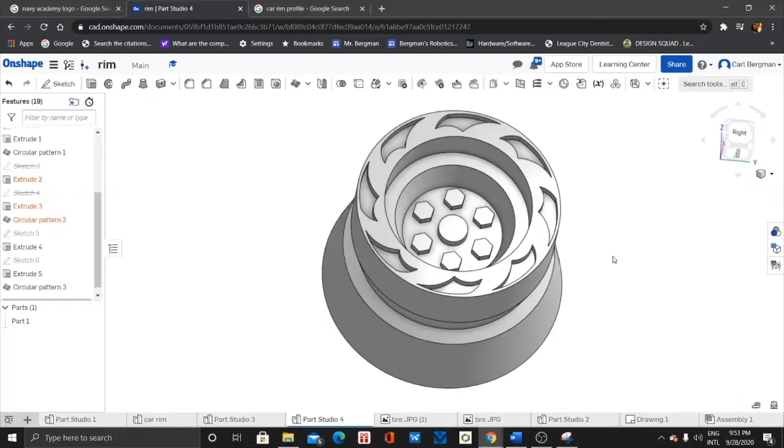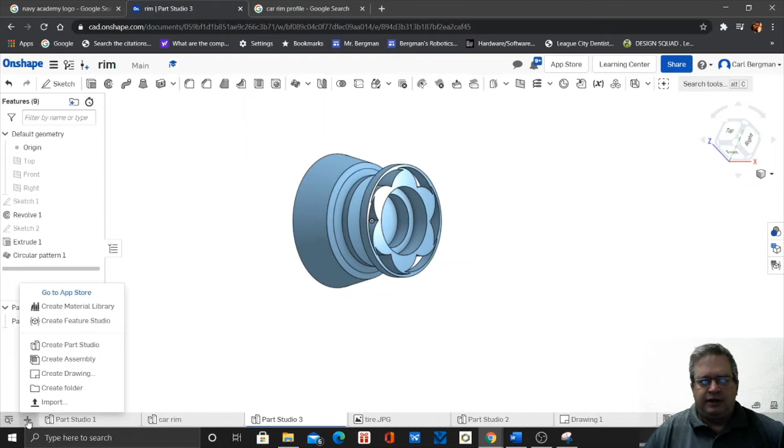So we're going to create a car rim. Let me fix my... You can go ahead and Google car rim profiles, and we're going to look at creating this profile to create your rim. It's not going to be exact, but you can go out there and do a screenshot of one of those profiles. I just drew my own, kind of eyeballed it and did my own.

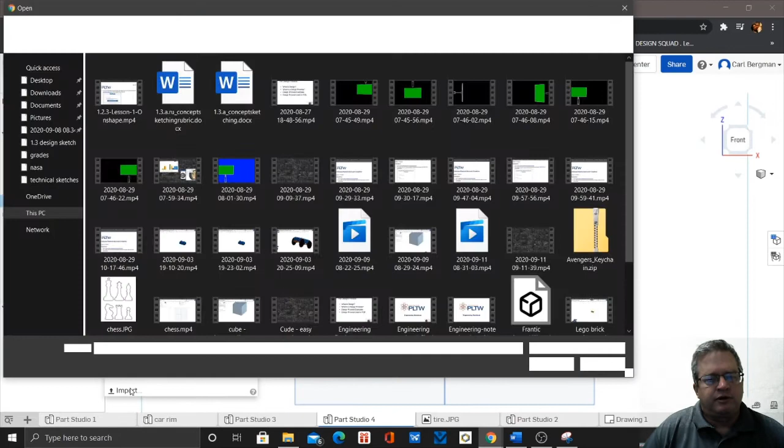I've already imported it in there, and that's the plus sign on the bottom left-hand corner. You go import picture into your project. I've already done that, so I'm going to go ahead and sketch, and then go to import image. It looks like I didn't already import it, so I do have to import it. So I'm going to go import, and here's all my other images. Got to find where it's at. It's at the bottom. All right, so this is one that I created myself.

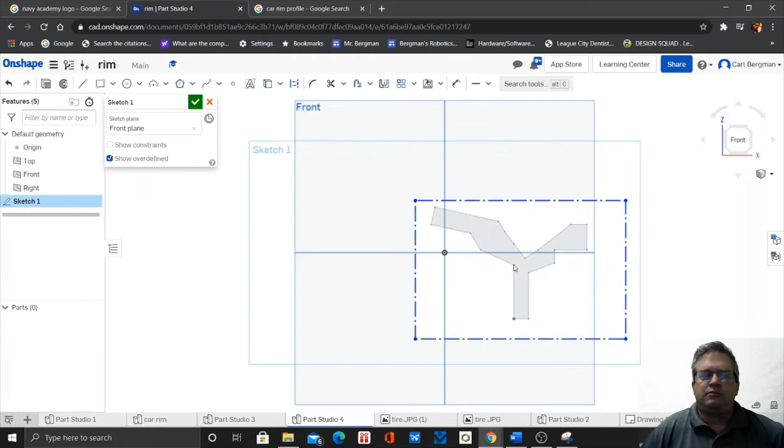The important thing here is that the two endpoints, the left and the right, are going to be straight up vertical. The upper two vertical lines do have to be vertical, and one of them is not, so it's a good idea to make sure they are. Otherwise, you're not going to be able to sketch on those with your flames and other stuff. So make sure those are vertical.

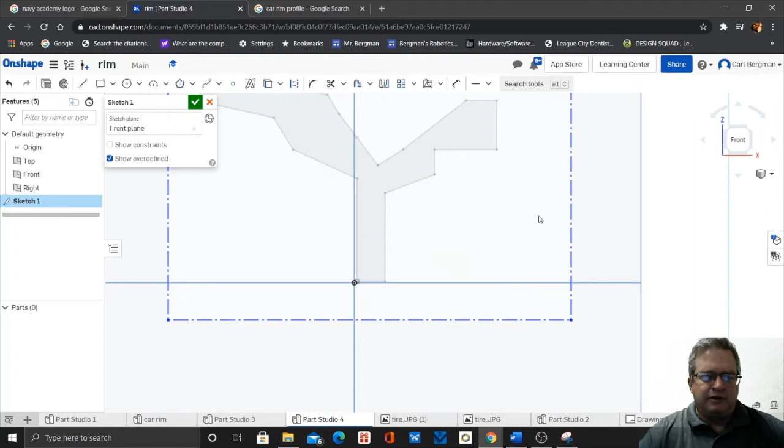So make sure one of your corners is in the point of origin, and you're going to want to make sure that you start and stop at that same point.

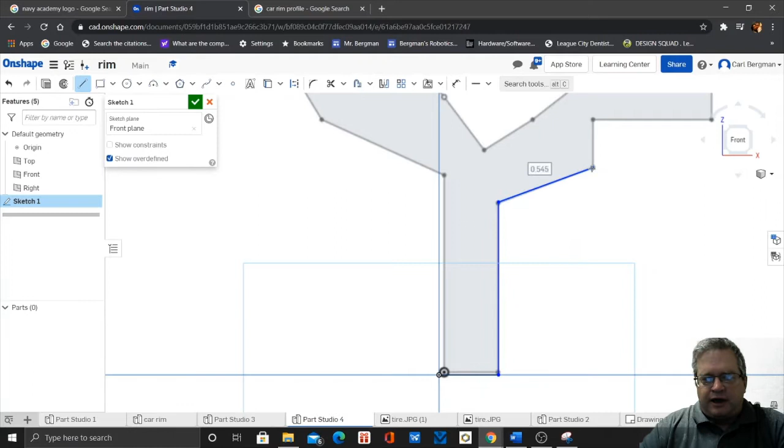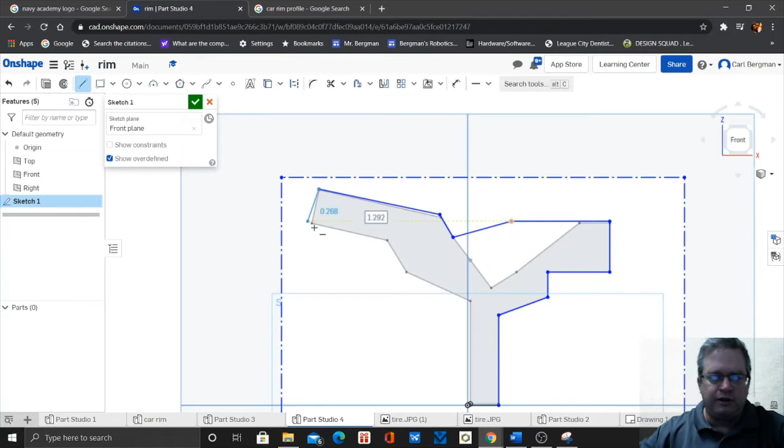We're just going to go line and trace it out. It's just line features, all we're using, we're not using anything fancy. And if you see that vertical line there, that has to be straight up vertical, and you'll get your symbol there if it is. So we're going to make this a little bit shallower than the original sketch. We want to get the left and right correct, but the rim was just a little bit too extreme, so that's why I cut it off at the top there.

All right, so the right hand vertical line is really important, and that's where we're going to sketch our flames onto that one. So once you got it connected and it's grayed out, you click OK, and we're going to revolve.

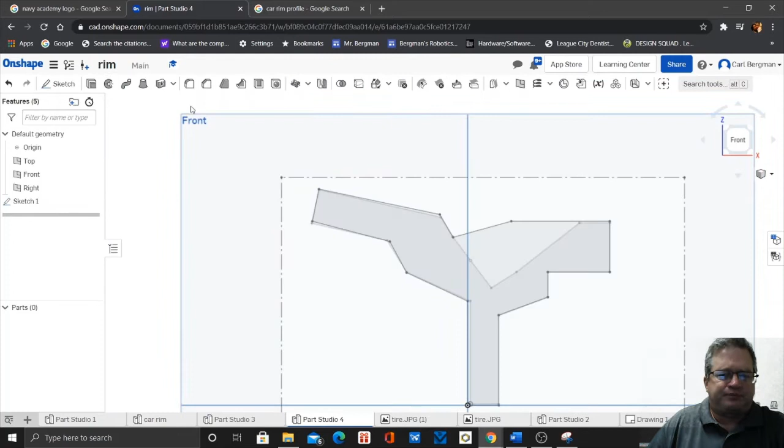So select our face, and if everything turns orange, that means you got it correct. We got to reselect our face, but there's our axis point. We have to reselect our face. Oh, no, it worked. Okay, did it work? Let's see. There it is, all right.

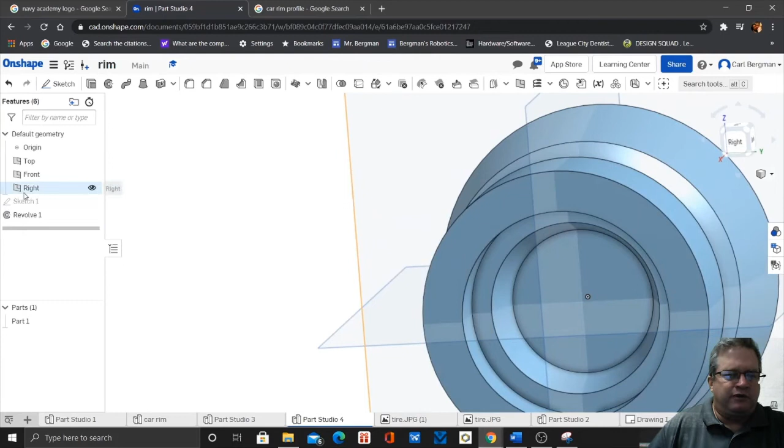So then you want to turn off all of your planes so you can see a clear view of your rim. All right, so we're going to sketch on this side of the rim. Remember I told you that the edge was important, to make sure that it was vertical, or you're not going to be able to trace on that thing.

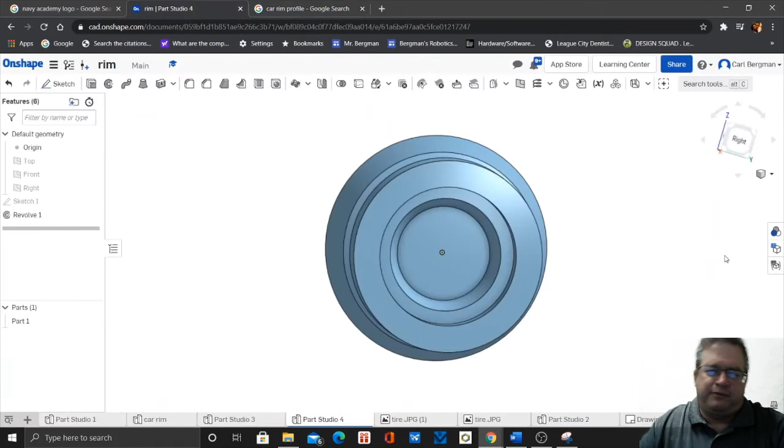All right, so we're going to pretend like we know what we're doing, and we're going to click, then right click and create a new sketch. We're going to try to create some flames here. So we clicked on that surface, then right click new sketch, and we're going to do a 3-point arc.

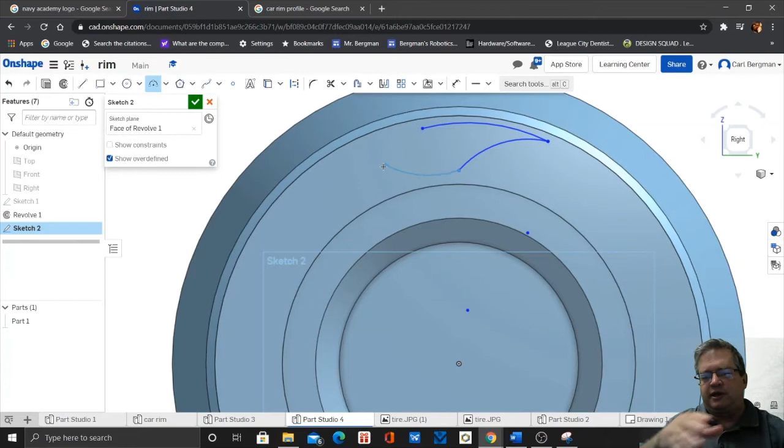And zoom in. We're going to try to create some flames, and you can go really crazy with this if you want. Remember, you have to click a couple times to anchor that in there. All we're just going to do is a 3-point arc. Make sure the lines don't crisscross each other like I was almost doing at the top there.

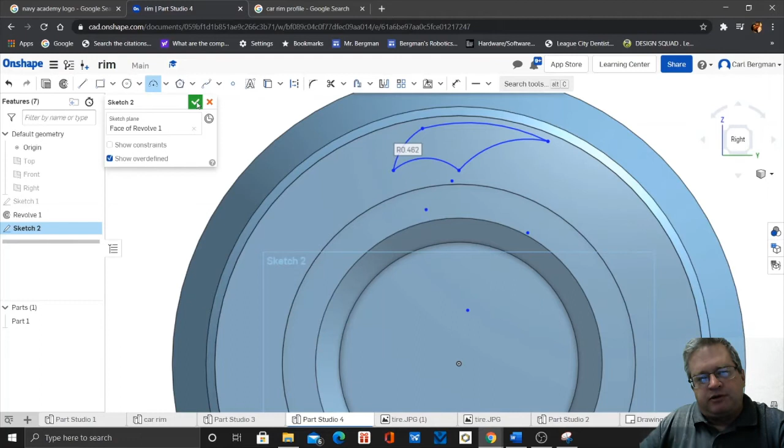We're going to try to create that. The flame is going to probably look more like a Batman thing, but we're going to create this, and then we're going to create our circular pattern. So click OK, and we're going to extrude.

And if you're dealing with inches, it's 0.02 inches removed, so we're going to remove, and we're going to put in 0.02, I believe. So you got to select the surface first, and then remove 0.02, I believe, is a good number on the inches. I'm not sure if you're dealing with millimeters.

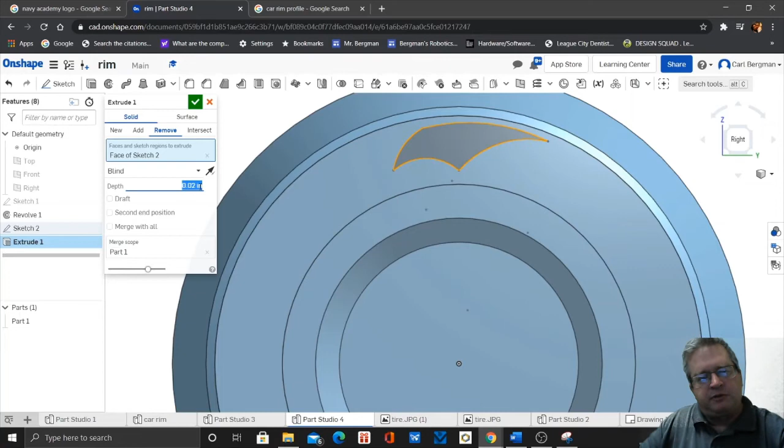Right click and rotate to see if you got it. So we're going to go a little bit deeper, you can grab onto the arrow and just pull it in a little bit.

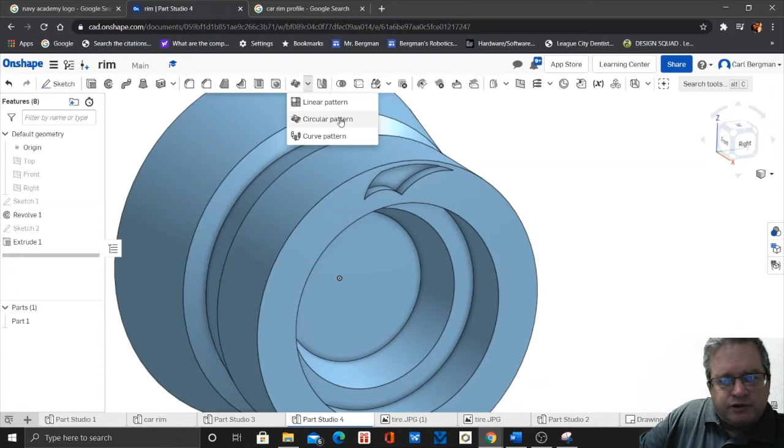Click OK, and there's your first cut. Now you're going to do a circular pattern, and your menu looks a little different, but you gotta just search for it. We're going to go circular pattern, and we're going to go feature. We got to do the feature. Click on feature pattern, and then we're going to click the interface of that.

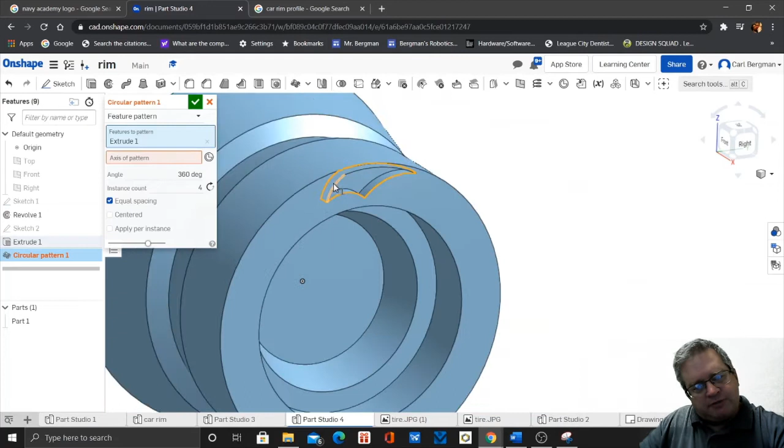The axis point is going to be the inner diameter of the closest circle. But if you look at the original sketch, you don't want to rotate around the sketch. You want to rotate around your extrusion. Your extrusion is what you just wrote on. So we're going to pick that circle.

So the default is 4. If you see the count number, I think we can go up to 6 on this one, maybe 7 or 8.

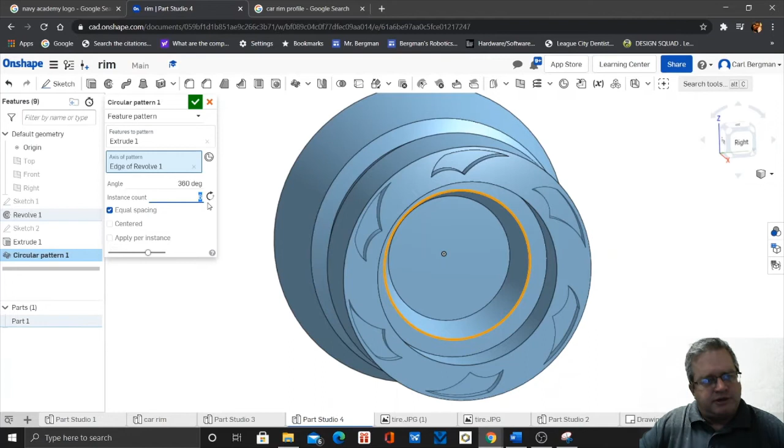And then I had to cut up, and then I had to splice my videos together. So we're going to right click in the center of that, and we're going to create our axle.

So right click, and we're going to do a center point circle. Did I select my center point circle? I think I missed it. Yeah, I missed it. New. Okay, center point circle. There it is. Okay, find your middle.

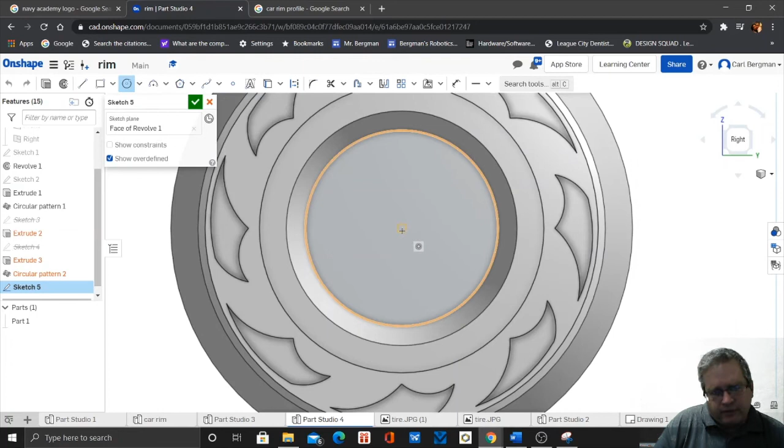Click, hold, and drag. We're not really doing a dimension on this. This is your axle. And then you're going to extrude that, and you're not going to remove. You're going to keep it on add.

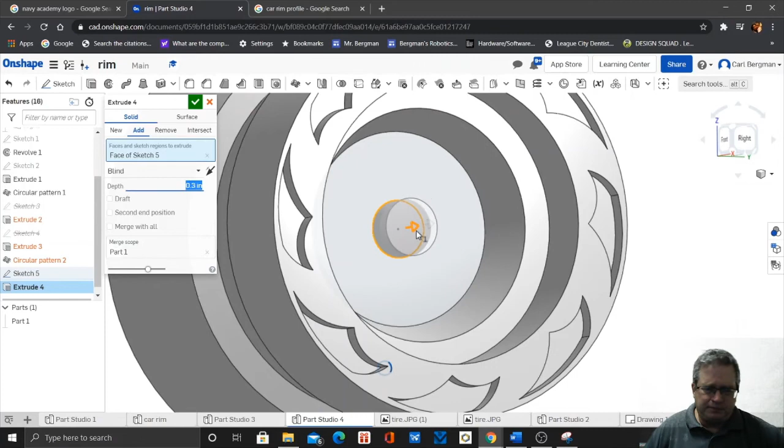Select your face, and then right click, and you can drag that arrow back as far as you want. So if this were a real rim, you may want to actually cut out a hole for that.

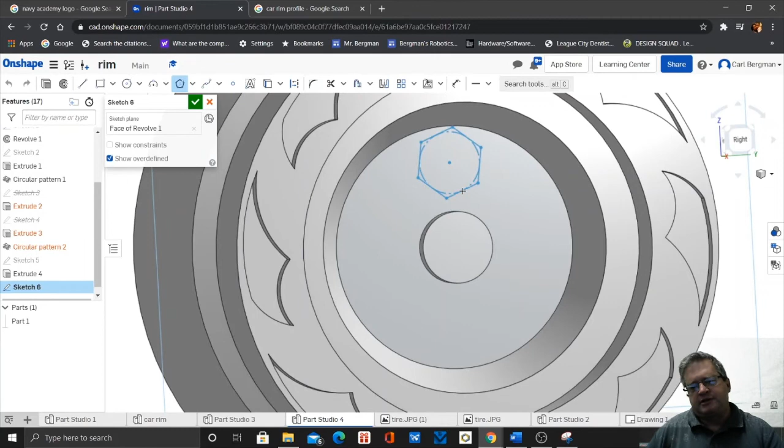Maybe. All right, so we're going to right click and select the face, and we're going to do a polygon for our bolt. We're going to do a 6-sided bolt. I think standard bolts have 6 sides. You're going to drag it out until you get the 6. And there it is. Place it there.

Deselect it. Press OK. Now we're going to extrude that bolt. And once again, I'm going to show you that if you want to use the pivot point, you're not going to be able to use the original sketch.

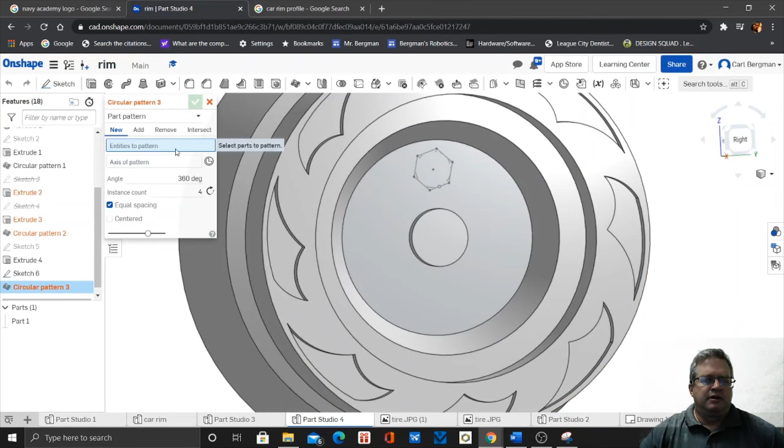So we got to extrude first, extrude, and then select that, and right click, drag your arrow down, just a little bit too far. There you go. All right, click OK, and there's your bolt.

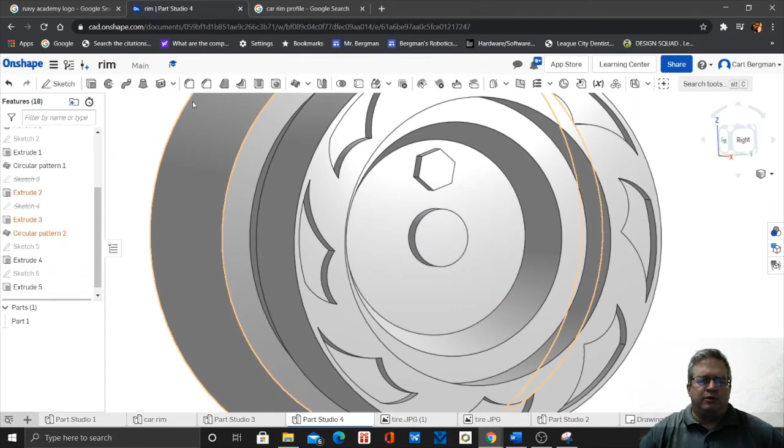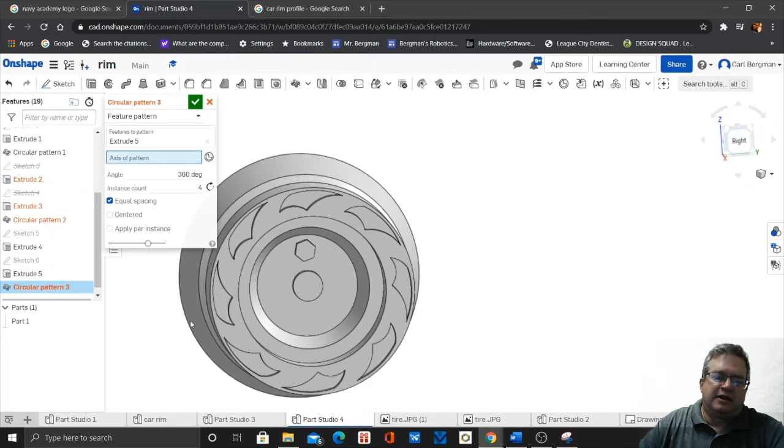Now we have to do a circular pattern, and we're going to go circular pattern, and we're going to select - okay, so we have to select feature, so that's the drop down feature pattern. So select the face of your bolt, the axis. All right, so if you look at the original sketch, once again I just want to remind you

that the original sketch is meant for the rim only, so you're not going to use the original sketch. Some of you guys are thinking, oh, I got to rotate around the sketch. No, we're going to rotate it around the extrusion, or the inner diameter of that rim.

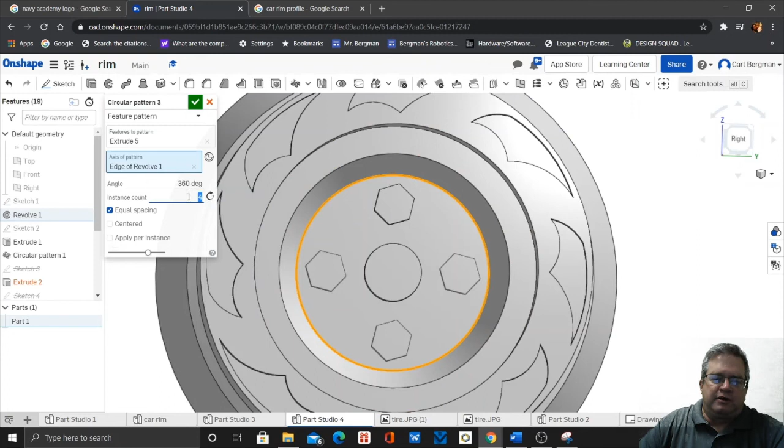And so we're going to put in, I think there's 5 bolts in most tires, or maybe 6, I'm not sure, 5 or 6. And then so there's your bolts, there's your axle in the middle, and there's your flames, if you want to call those flames. And then so that's your rim.

So have fun with this. This is going to be probably a multi-day project.